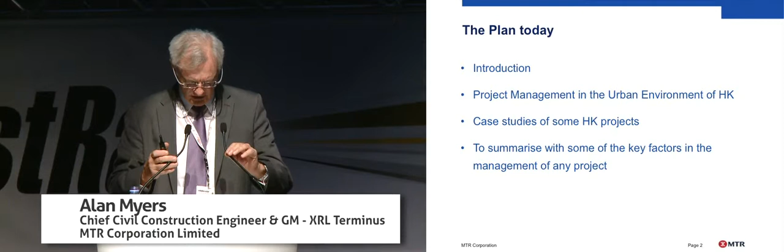My plan today, providing I don't run out of time, is to talk about project management in Hong Kong, a very urban environment. I've got some case studies I can talk about because of what we're doing at the moment. Finally, if I've got time, some key factors that might be important to yourselves in the Middle East. I worked in the Middle East 5 or 6 years ago, so I understand a little bit about the way you operate.

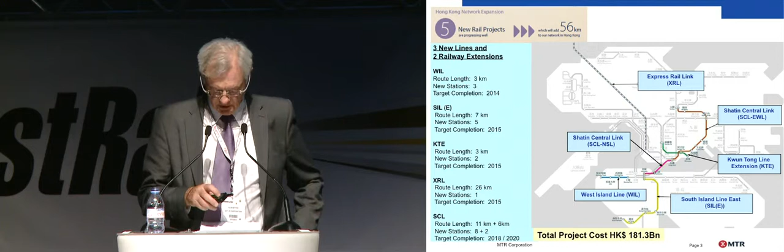First of all, we're doing 5 extensions at the moment to our railways, currently more than 20 billion US of spend - much more than anyone else in the world at the moment, except for mainland China. We're extending our railway by 56 kilometers, and I can talk to you a little bit about some of the key challenges we've got, mainly on the interchanges with our existing railways. I'll be coming back to this slide later and pointing out exactly what I'm going to be talking about for our case studies.

First of all, a little bit about MTR - are we an intelligent client? We've been operating for 35 years.

With the number of people in such a small location, you would expect us to make our operations pay, and we do that. We're transporting 5 million passengers every day now. We've just reached 5 million, and it's going to increase once we open the new lines, the first one which will be the end of this year. And we have the unenviable pride of having a punctuality reliability of 99.95%.

Can it be better? I don't know. What we're monitoring ourselves to try and establish new parameters to measure ourselves. I just noticed this week that we do an analysis of the passenger affected ratio, and we topped 1,000 journeys this week for the first time, which means any passenger using the mass transit railway in Hong Kong would expect to carry out 1,000 journeys before they're affected in any way by delays. And if we have delays of up to 15 minutes in any of our days, it usually reaches page 3 of the local newspapers, and if it goes above 15 minutes, it's right on the front pages.

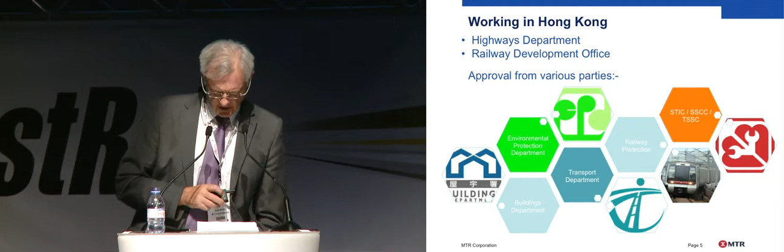The second role that I have at the moment, as well as obviously in the construction of all our major projects going on at the moment, is that I've moved my office to the West Kowloon terminus for the high-speed rail extension. One of the things the Hong Kong public made very clear was that they didn't want to see a high-speed rail linking to mainland China, and so all of the railway, when it crosses the border, is underground - 26 kilometres, deeply underground - until it comes out at this spectacular terminus.

And the impact when people come out, they will... sorry, how do I go back?

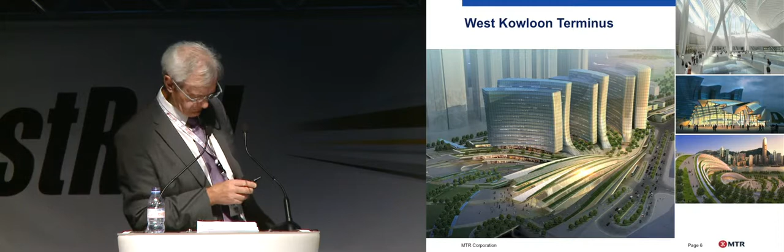There's a very spectacular steel and glass structure that will impact people when they get off the trains and come up the escalators into the concourse areas. From the outside, it will be quite spectacular, and this glass facade overlooks Hong Kong Island. At the end of the day, the terminus is all underground, and above it will be parkland and recreational areas, as well as new properties that we're going to be building on top of it.

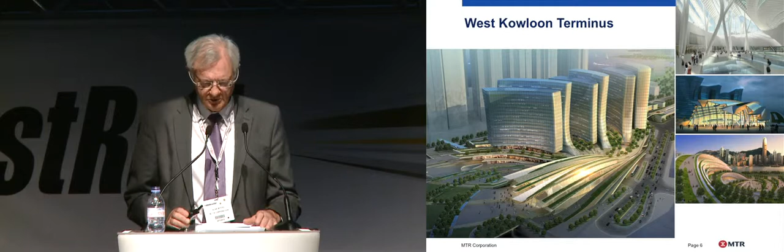The terminus at the moment is valued at over 4 billion US just for the terminus. It's a kilometre long, retained by a diaphragm wall box, a 2.5 kilometre diaphragm wall box. It's right against the seafront at the far end, and it comes from the twin tracks that come through 26 kilometres to a 15 platform terminus, 6 for long-range 400-metre-long platforms for 16-car trains, and 9 local platforms within the immediate Guangzhou area of southern China.

The intricacies are such that the diaphragm wall has to be load-bearing because we thought it might save us some money, so all of the diaphragm walls had to be founded well into the granite, 30 to 40 meters below the surface in this area. Creating and testing that interface put us into some delay, which we've had to recover, and we are doing so.

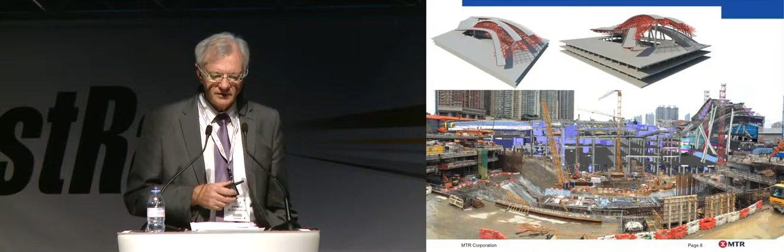This is a schematic of what it looks like. We've got a big box that has to be excavated, 4 million cubic meters of spoil. We're building the central core as a bottom-up construction, so we excavate down and have to maintain the spoil against the diaphragm walls to maintain their stability. At the outer edges, we're building it top-down so we can close the two together to make it most efficient.

The big steel structure is on this side, where we've got something like 26 megacolumns, all highly stressed. You can see from the skeleton drawing here the intricacies of the permanent steel. The temporary structure that has to be built in order to install these steel structures is very, very high tech. It's one of the most difficult steel structures that's been attempted.

In trying to recover the delays here, we've had to change all of our sequencing, which means the interrelationship on the temporary works designs, which was the contractor's responsibility, goes from the soil stability models into the lateral support modeling in the designs, and that into the connections between the steel structures and the concrete structures, and the movement of all of those, because the diaphragm walls are still moving considerable amounts until the excavation is complete.

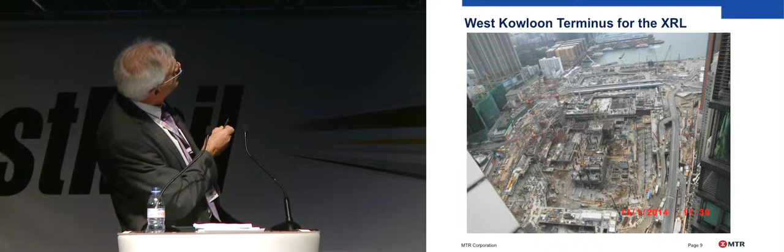Just some up-to-date photographs. You can see the central core here being formed, and the start of the steel structure in this area. All of the back of house nearest the sea is completed, and we have E&M installations — the chillers went in last week, and transformers are already being installed as well.

So at one end of the project, we've got all of our integrated services in there, and at the other end, we're still excavating spoil, and we've still got a lot of spoil to excavate. So we've created a logistics team that manages all of the gates into and out of the site in a very thorough and robust manner.

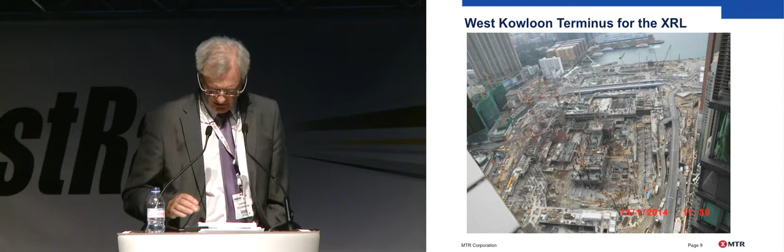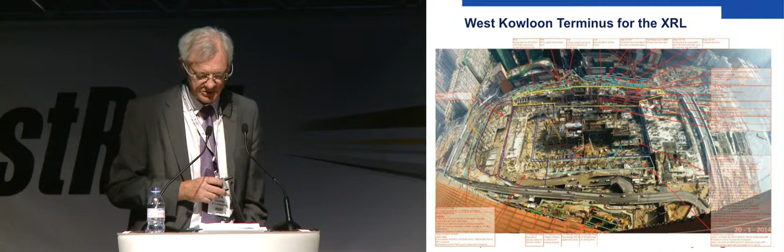This is one of the photographs, and another one. This is how we report on a weekly basis to the rest of our management teams on where we're working and what we're doing.

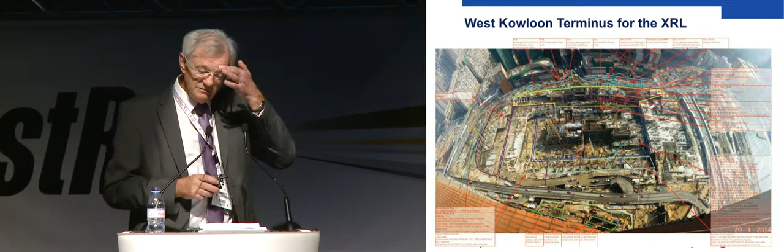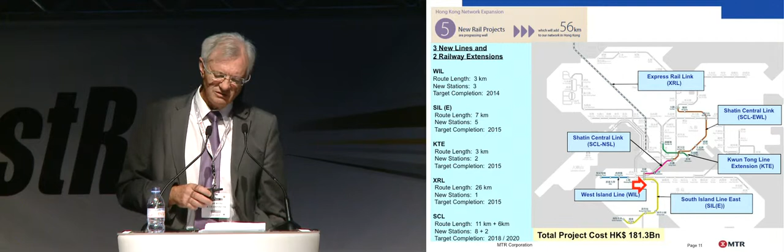Moving on, I wanted to talk about one of the other very complex construction projects we're doing, an interchange. This is a four-way interchange at Admiralty Station on Hong Kong Island, where we've got a new line coming in, two new lines that will be coming in below the existing lines.

In plan, the initial two lines go back 30 years. We have the one that crosses the harbour here, the island line here, and the original existing station is here. Now we've got new lines going to the south of the island, and second lines coming in across the harbour, the Sha Tin Central Link.

This area here is, from a construction point of view, very critical. We have to go underneath the existing island line. The area, to put it in context, is about half the size of this room and twice as high — I worked that out yesterday.

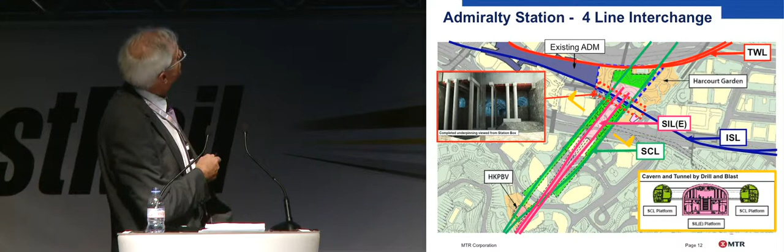And we have to take that out in rock. The island line, which runs here, wasn't actually built to be propped from underneath and supported underneath. It was designed to sit on solid rock, and we're taking that rock away.

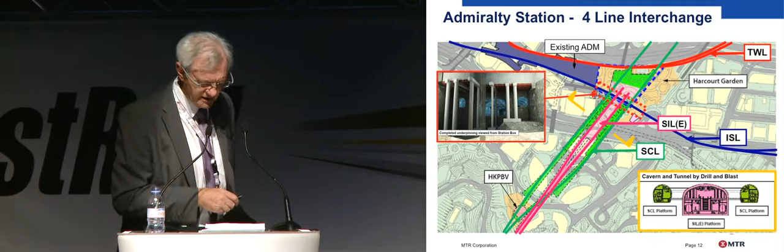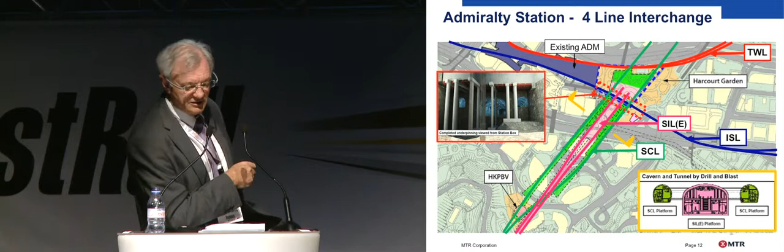So it's not easy to actually provide the support, and we're having to do it with a whole series of extending pillars and coordinated jacking to make sure that the running railway, which is here in this photograph, isn't interfered with, and we'll be monitoring that to make sure nothing moves.

So that's one of the most technically demanding interchanges, and that's why I say interchanges are so vital — you don't want to interfere with your existing line.

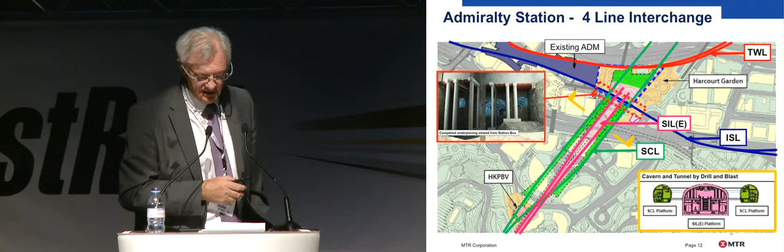And the two lower lines — this is a schematic, but it shows how we're having to go underneath the existing concourses and put escalators in and atriums to make it impressive, because it's now right in the centre of our main business district, and it is a critical interchange.

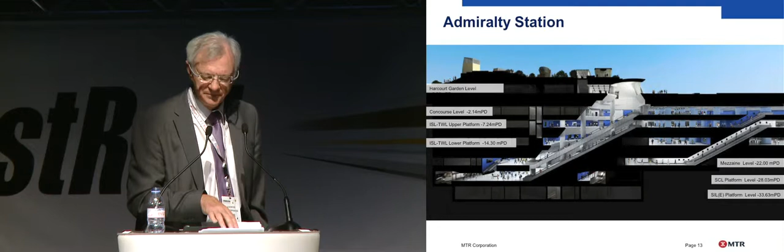We had some leave-behinds 5 years ago, and we've had to increase our headways and increase our trains to maintain Admiralty Station as a pleasant place to be, rather than a place the public weren't happy and comfortable with. We're having to extend that with two new lines coming into Admiralty.

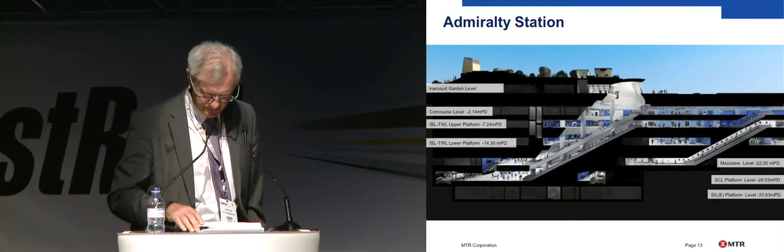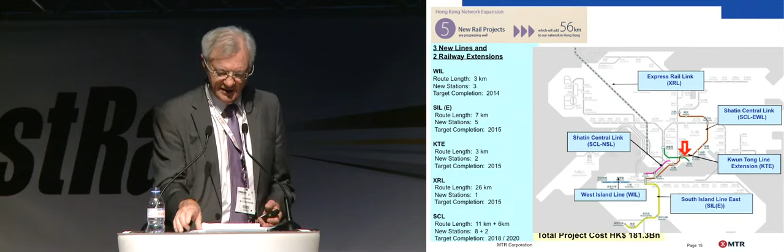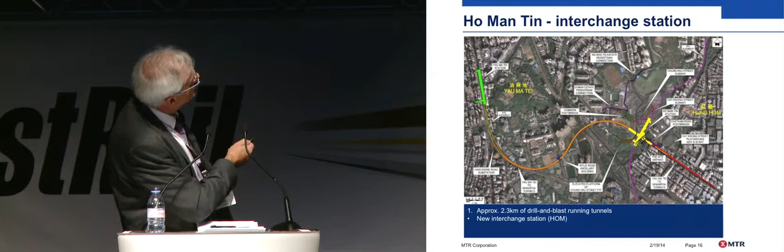Moving quickly on, another area I'd focus on is shown by the arrow, the interface between two new lines. We're extending the original line, which stopped here. On one side it extends across to Hong Kong Island, but this was an extension planned to go around here into this development against the harbour at Whampoa. We've had to change the location of that.

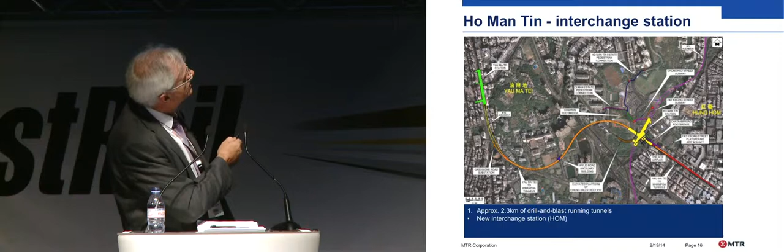We've got a very sharp S-bend here, which is a drill and blast contract, to enable us to have an interchange here. The funding for that is going to be by property development above the station.

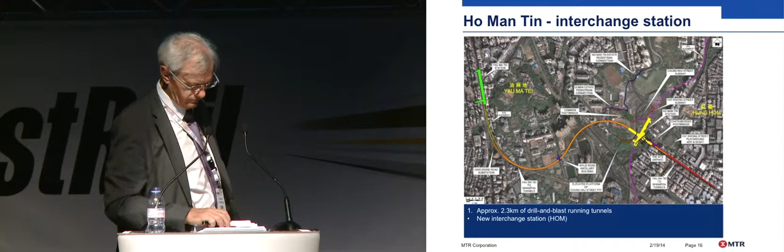This is a photograph of the work. The station is going to be in this area, and the property development will encompass all of this area, and it'll have some very good sight lines across the harbour.

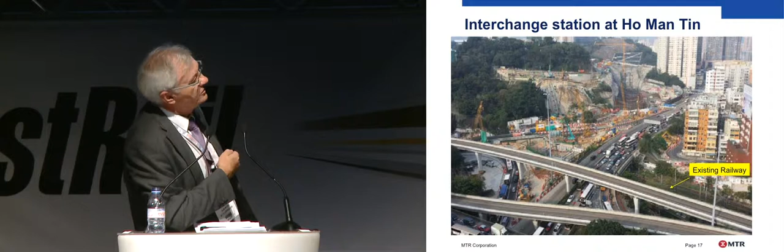One reason to show this is because there is an interchange, but the existing railway is here. This is where risk management comes in, because we've got target cost contracts on this one and also on Admiralty, because we want to manage the risks. We want to know what the contractor's costs are, and we want to make all the decisions needed to prevent any impact on our existing railway.

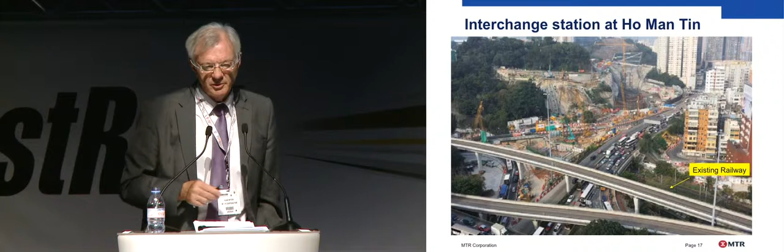Because of the closeness of that in this area, we wanted to keep control of it. As I said, we're front page news in Hong Kong, so whilst the contractor might have an incident, he will probably recover his costs through insurance, etc. We can't live with the publicity and media of something going wrong with one of our railways, and so we want to keep control of that.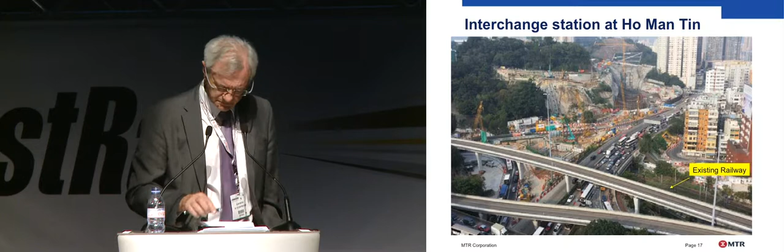Just as an example of how close we get, this is the existing railway here. That has to keep going — that's our main railway line at the moment up into mainland China and the border.

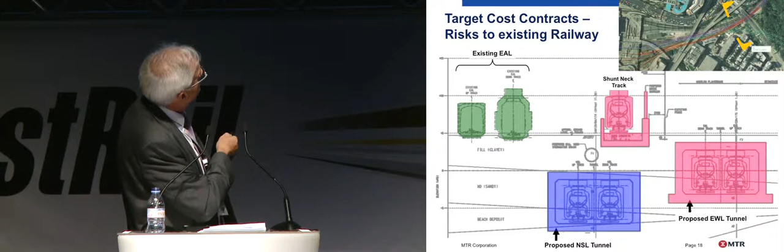We are building this underneath, and very close to it at the side. They get even closer in this area here. So in order to manage the construction of this, we're sharing the risks with a target cost contract with one of our contractors.

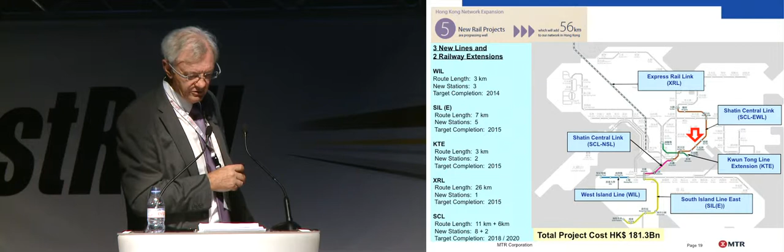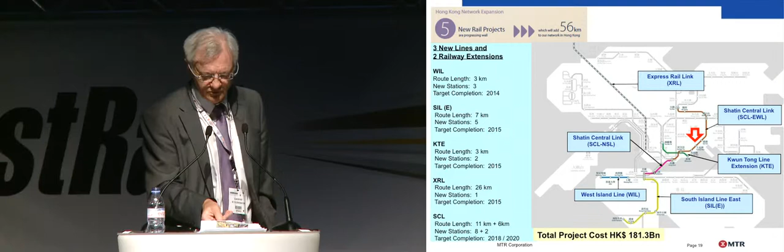Just moving on to a slightly different area where we've got some technical demands. We go through a very old area of the city where this red arrow is, and we wind our way through against some very old buildings.

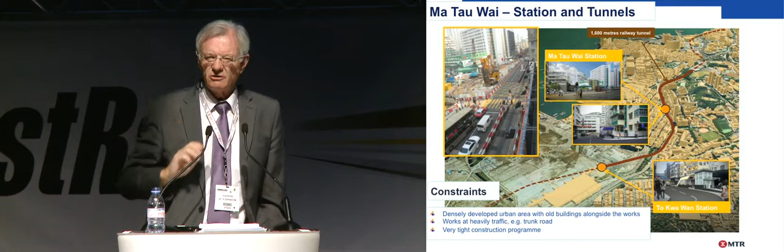The cheapest and quickest way of building this station would be to knock all the buildings down around it, because they're all going to be knocked down when the station opens anyway. Developers are going to come in, knock the buildings down, and build high-rises instead, because everybody wants to live on top of a station.

Incidentally, nobody wants to live near a ventilation shaft. Just bear that in mind, because that's where the opposition comes from. When it comes to a station, everybody wants to live above it and the facilities it affords.

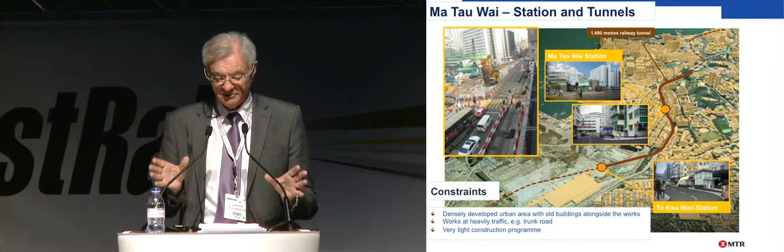This is a very dense area with some very old buildings. We've got one building that hasn't got any foundations - it's actually just been built between two adjacent buildings, totally illegal, and it's an 8-story building. It hasn't got any foundations, it's just fixed itself to the buildings beside it that have foundations that may move differentially to each other. So we're having to deal with the likes of that.

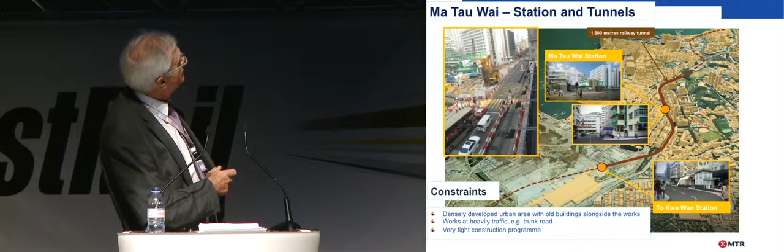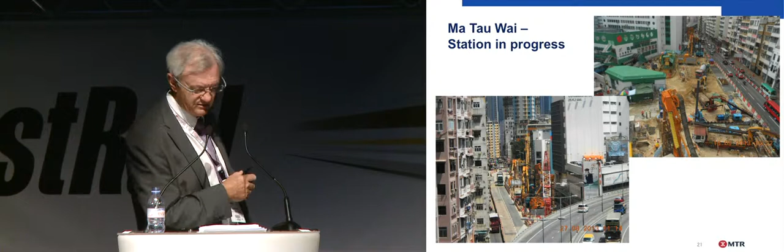Moving on, just some of the types of equipment that we're moving very close to the public. This is one of the key factors - managing the public's expectations. They're our key stakeholder. Some of the people who live near our mainline stations on our existing projects are our tenants on our property division, so when they complain about noise or anything like that, we've actually got to recognise that and deal with it.

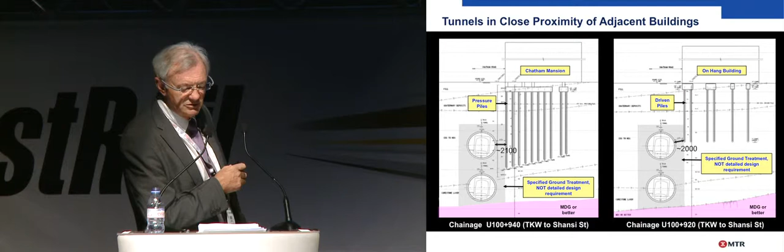We're driving our tunnels very, very close to existing foundations, which in itself has to be well controlled and managed.

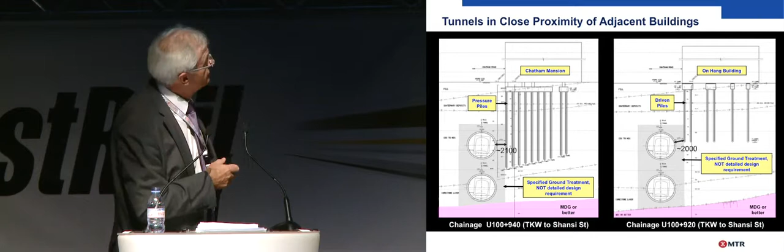Let me just go back on project management in general, because I think it is important. I think I said that we have 30-odd contracts, and we have a standard way of operating and procedures, etc., but we still have people involved. I know that in the Middle East, most of your project managers now, you're asking for PMP, so they should know process. But it's the soft skills that are really key, and it is the people.

I put it down to the ability to judge value and foresee issues before they happen. Risk management, it could be, but it's even more than that. It's nous and experience.

You've got to make sure you've got the correct contractual arrangements, and we vary them. We do have some design and build for our cross-harbour, for instance, where the risks are best managed by the contractor. And you've got to make sure that everybody involved in the project has the right incentives and the right behaviours to perform to their best.

Everything needs to be well planned in detail. Don't accept anything that's not planned in detail. It means the people involved don't actually understand what they've got to build. And we found that with our big terminus - once we got into the detail, people's lack of knowledge was there.